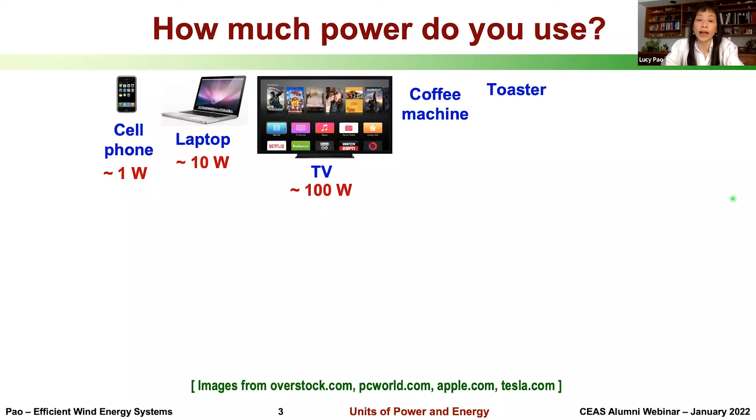Now, there are many appliances in our house that use about 1,000 watts, which is 1 kilowatt. On average, most households draw about 2 kilowatts of power. So you might have one of these appliances running, plus maybe a TV, and you might have your laptop, cell phone charging, and maybe some lights on. Now, if you're running several of these appliances at the same time, then of course you're drawing much more power.

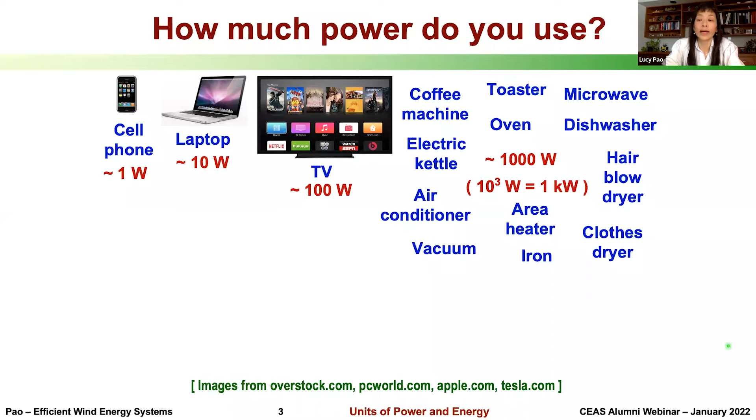Now, more and more people are getting electric vehicles, and if you literally plug into a normal wall outlet at home, it will only draw about 1 kilowatt. Most people who buy electric vehicles will reconfigure one of their wall outlets at home to be able to charge their car more quickly, and this allows the car to draw about 10 kilowatts. And there are, of course, supercharging stations that allow you to charge even faster, and those allow the cars essentially to draw about 100 kilowatts.

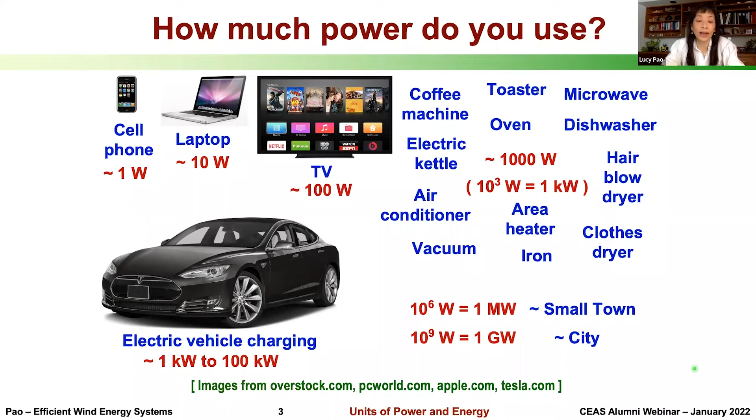Now, 1 million watts is a megawatt, and that can power a very small town. And 1 billion watts is a gigawatt, and that can maybe power a city. Now, the amount of energy used is equal to the power multiplied by the amount of time that power is needed. So if your dishwasher uses 1 kilowatt and it runs for an hour, it uses 1 kilowatt hour of energy.

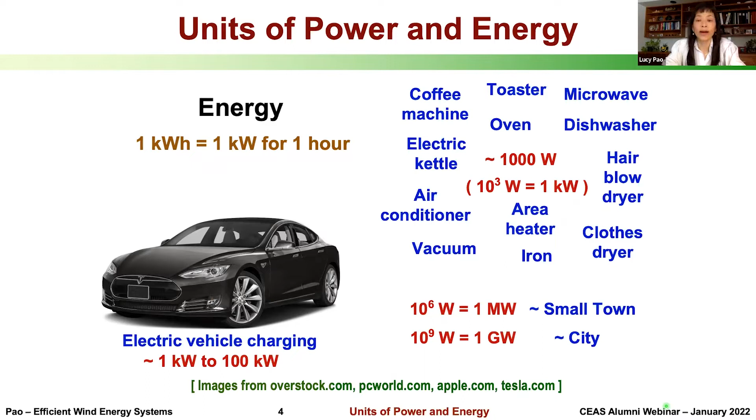All right, so with that, let's now take a look at the status of wind energy. Over the last decade, the installed wind power capacity worldwide has been growing at about 14% per year. There's now more than 730 gigawatts of installed wind power globally. Now, the country with the most installed wind power capacity is China, which has had an average annual growth rate of 27% over the last 10 years.

The US is second with a growth rate of about 12% per year, and then Germany is third with a 9% annual growth rate. So together, China, US, and Germany have more than 60% of the world's installed wind power capacity.

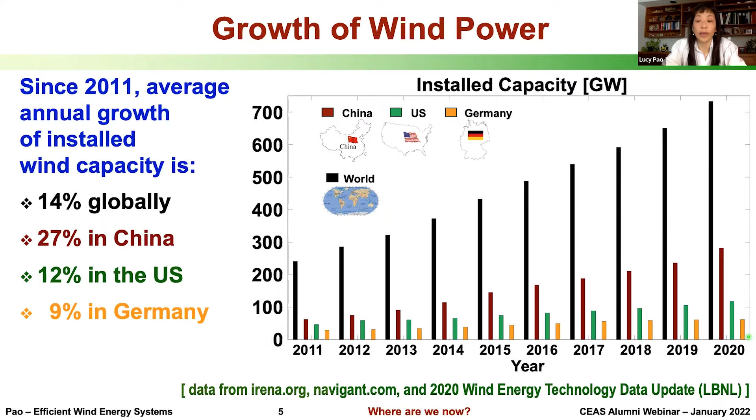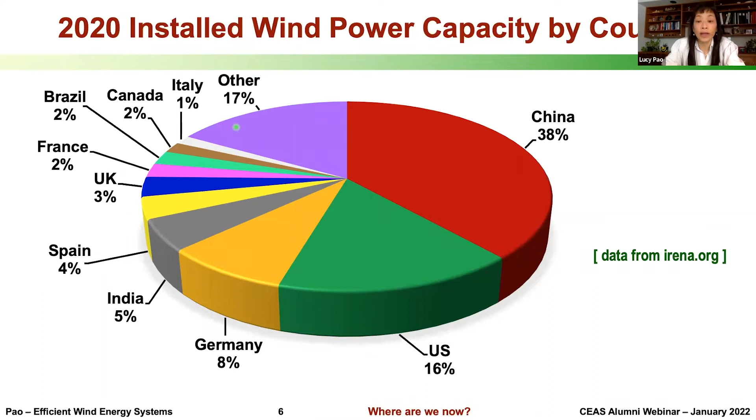Now, this pie chart shows the top 10 countries in terms of installed wind power capacity. And of course, there are many other countries that also have installed wind power. Now, another way to compare countries is by what is known as wind energy penetration or wind penetration, which is the percentage of a country's electrical energy needs that is provided by wind.

In this regard, Denmark is the #1 country. Almost half of Denmark's electrical energy needs is met with wind energy. And these are averages across a year. So Denmark actually does reach 100% instantaneous wind penetration levels at times, in which case they're trying to transmit excess power to other countries that can better use that power at those times.

Now, the top 3 countries that I mentioned earlier in terms of installed wind power capacity, they actually have the reverse ordering in terms of wind penetration. So China has a very large population and hence large electrical demand. And so only 6% of their electrical energy needs are met by wind. In the US, we're unfortunately somewhat energy hogs, and only 8% of our electrical energy needs are being met by wind. And Germany is at about 27% wind penetration. Globally, less than 10% of the world's electrical energy needs are met by wind.

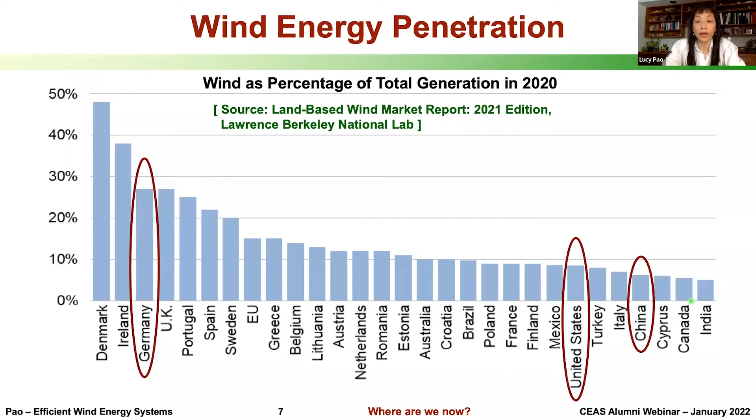So what all this data shows is that it is possible to achieve rather large wind penetrations and still have a stable power grid. And what this data also shows is there's still a lot of room for growth. And many countries are trying to increase their wind capacity in order to mitigate the effects of climate change.

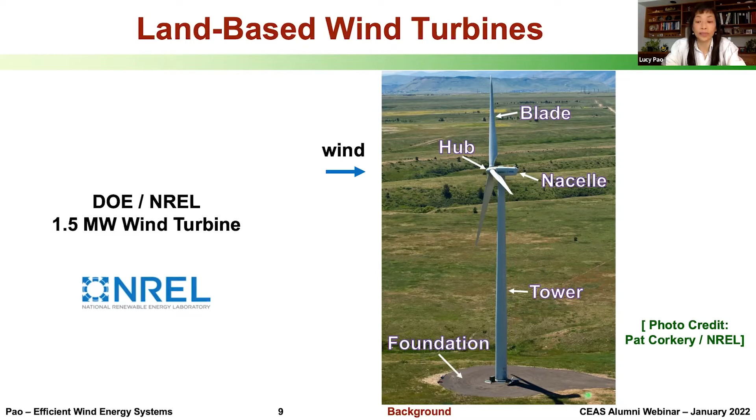All right, now wind turbines, as you've probably noticed, have become bigger and bigger over time. And this is because there are economies of scale that can lead to lower costs of wind energy as turbines get larger. Now, over the last 40 years, wind turbines have gone from hub heights of about 17 meters to now over 100 meters hub heights with at least 60-meter long blades. So in this range, we're at approximately 5 megawatt wind turbines.

Now, we often see wind turbines really far off, and it's hard to appreciate just how large these machines are. If we compare with, say, a Boeing 747, looking at this 100-meter hub height and about 120-meter rotor diameter. And if we compare this rotor area with, say, the Boeing 747 and a football field, including the end zones, hopefully you can appreciate just how large these structures are.

Now, land-based turbines are not really getting much larger than 100-meter hub height and 120-meter rotor diameters. And this is largely because of road and railway constraints in transporting wind turbine towers and blades on land to their wind farm destinations. Offshore wind turbines, however, are not subject to the same constraints, and so they've continued to grow. And there are already a few commercial turbines operating that are more than 12 megawatt turbines and which have hub heights of 150 meters and have rotor diameters that are more than 200 meters. So these are blades that are more than 100 meters long.

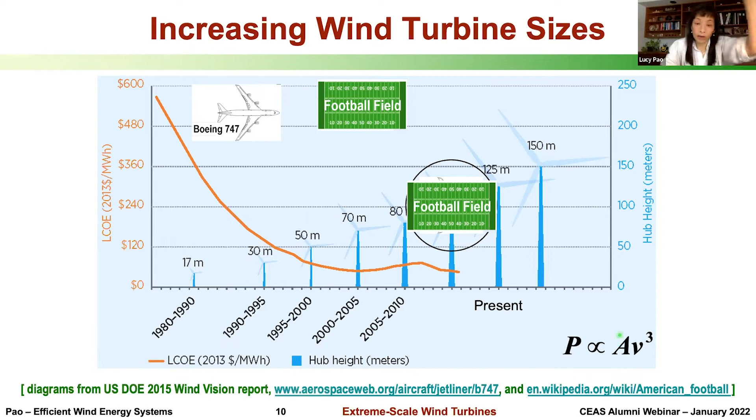Now, one of the reasons that the cost of wind energy decreases with larger turbines is that the power is proportional to the cube of the wind speed, and there are generally higher wind speeds higher off the ground. So building taller wind turbines allows them to capture much more power that's available at those higher wind speeds higher off the ground.

So power is also proportional to the rotor area, and so of course taller towers allow you to put a larger rotor on them. So larger turbines also reduce the number of turbines required for a given site or a given size wind farm, and that cuts down on installation and operations and maintenance costs, and hence this trend towards larger and larger turbines.

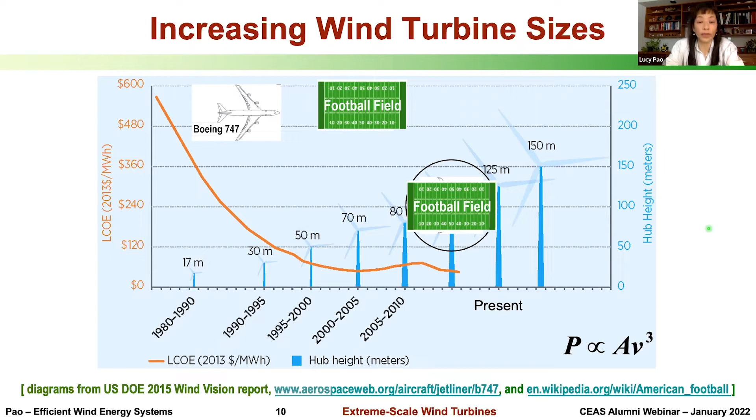Now, along the lines of extreme scale turbines, I'd like to highlight a project that my research group has been involved in with a rather large team, and we've been working on this over the last 6 years. So we've been exploring a downwind 2-bladed as well as 3-bladed concept where we're really focused on really lightweight, flexible rotors. And we believe this downwind concept could be very beneficial as we get to very, very large turbines.

The average size of onshore land-based wind turbines is now about 2.5 to 3 megawatts. And in this overall project, we've been designing 13 megawatt to 50 megawatt wind turbines. Our 13 megawatt wind turbine designs have blades that are over 100 meters long, and that's longer than a football field. And our 50 megawatt turbine designs have blades longer than 200 meters. And that, of course, means that the rotor diameter is more than 400 meters. So these are really large machines.

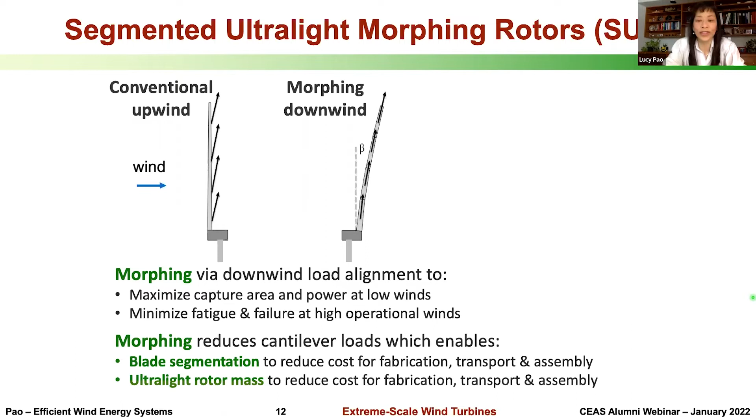So this is akin to how palm trees go with the flow in tropical storms, right? They're very lightweight and the fronds morph downwind, and palm trees can survive hurricane conditions. This is in contrast to oak trees that, while huge and massive, can get uprooted in severe storms, as shown here. So with this downwind concept then, when the winds are light, the rotor will be pretty wide open and trying to maximize power capture.

As wind speeds pick up, the blades will naturally morph downwind, reducing structural loads in the blade. And also by morphing downwind, that reduces the power capture area, naturally kind of regulating the power in these high wind conditions, because typically we don't want to be producing power that exceeds the rated power of the generator that's in the turbine. And so there are a lot of benefits here.

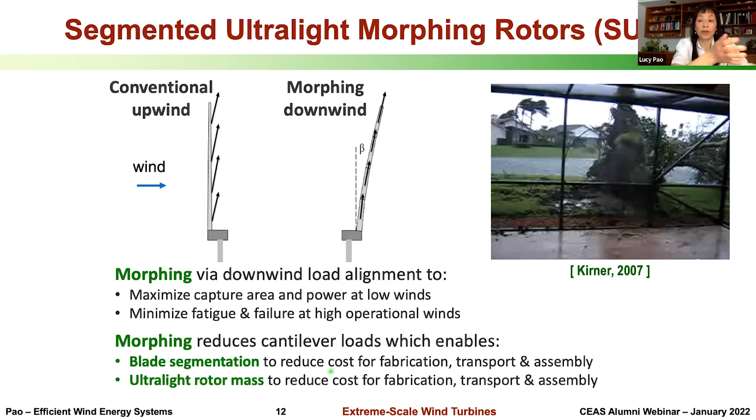Now, with this downwind concept, the blades are lighter, which means that less material is needed to build them, and that makes them less costly. And if they're lighter, then they're also easier to transport and assemble. Now, as we are getting to extremely long blades, some of our collaborators on our overall team project are also exploring how blades can be manufactured in a segmented fashion. Most wind turbine blades these days are manufactured as one whole piece per blade. Being able to make the blades in multiple pieces will make them easier to transport.

Now, wind turbines require large teams to design them. And usually it's a rather sequential, linear design process. The aerodynamicists design the shape of the blades, and then the structural experts determine the layup of materials needed in the manufacturing process.

Now, my group's research area is in the control systems area, and usually by the time that we're asked to design a controller for a wind turbine, all the other aspects have already been designed, and we're just asked to design the best controller that we can to make the turbine operate as efficiently as possible. That is, we want to generally try to have the wind turbine produce as much power as possible under the range of wind conditions expected.

Now, I don't have time in this short talk to really get into the details of the controller designs that we're developing. But one aspect, for instance, is that we measure the rotor speed, so that's how fast the rotor is spinning, and we decide how to pitch the blades. The blades can be rotated, and that changes the aerodynamics, and that can then affect how efficiently the turbine is operating.

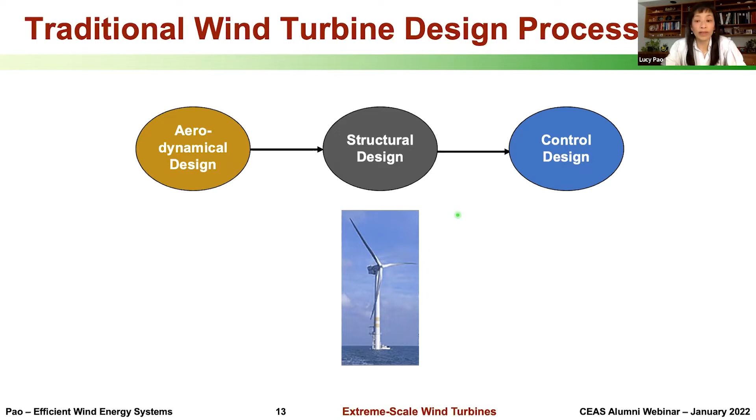And so in our project, in part because we set some very, very aggressive milestones for ourselves, we ended up working more closely as a team. And by doing so, we found we could end up designing more optimized wind turbine designs.

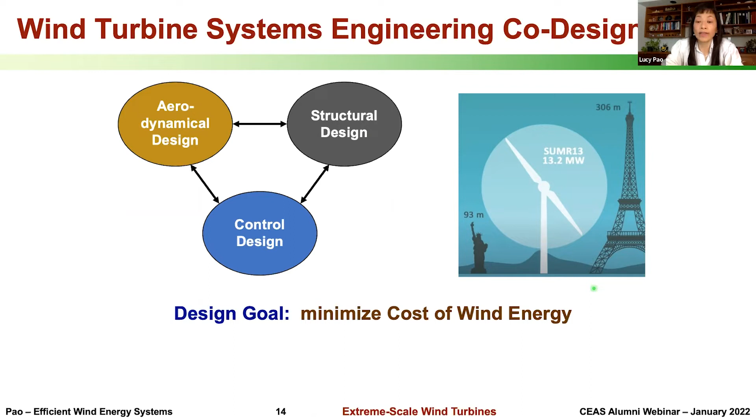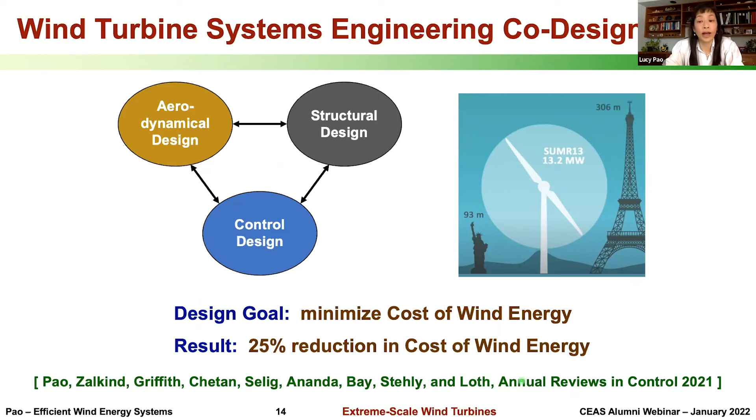And we were recently able to show, by using what we call this co-design process, that we could design a 13 megawatt wind turbine based on our downwind lightweight concepts, where we're trying to minimize the cost of energy. And we are able to show that the lightweight downwind concept can yield wind turbines that lead to a 25% reduction in the cost of wind energy compared to traditional three-bladed upwind designs. So that means that wind energy can be made even more economical than it already is.

Now, in order to demonstrate new concepts, it's very important to be able to experimentally demonstrate them either in a wind tunnel setting or actually out in the field. And we were lucky enough to be able to do some field tests on a research turbine at NREL. So what we did was we took one of our detailed 13 megawatt blade designs and we gravo-aeroelastically scaled it down to 20% scale. And so we ended up with blades that are approximately 21 meters long.

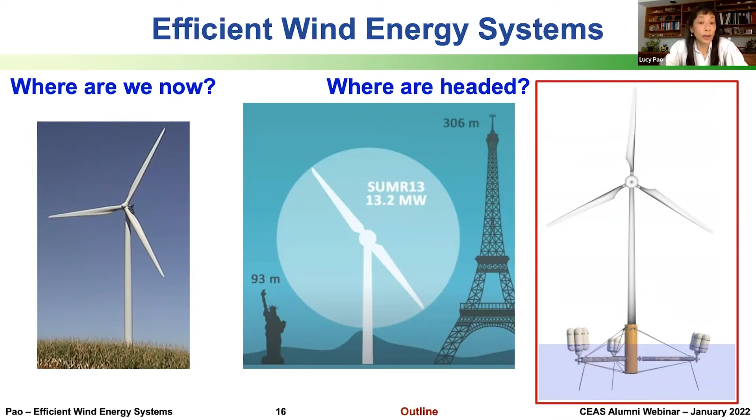With land-based turbines, there are constraints on maximum sizes due to road and railway transportation limits. Offshore, there are fewer constraints, so turbines have continued to grow in size for offshore applications.

There are currently two very small offshore wind farms in the US. One is the Block Island wind farm, just off the coast of Rhode Island. It's a 30 megawatt wind farm, which is very small, using five 6 megawatt turbines. That went into operation in 2017.

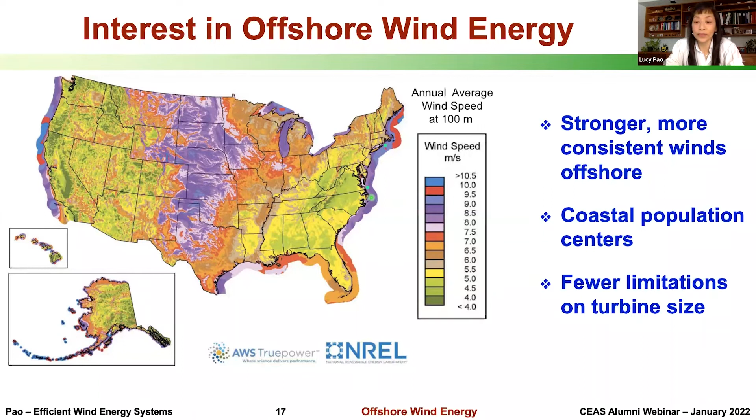Now let's look at the growth of offshore wind power. Recall that the total wind power installed capacity, both land-based and offshore, is now more than 730 gigawatts worldwide. Installed offshore wind capacity has been growing at an average annual growth rate over the last decade of 28% globally, which is twice as fast as the growth rate of wind power in general.

Globally, offshore growth is expected to continue at least at this annual growth rate, meaning there will be more than 110 gigawatts of offshore wind by 2025. It's really tremendous growth. At the end of 2020, global offshore wind was only about 4% of the total installed wind power capacity.

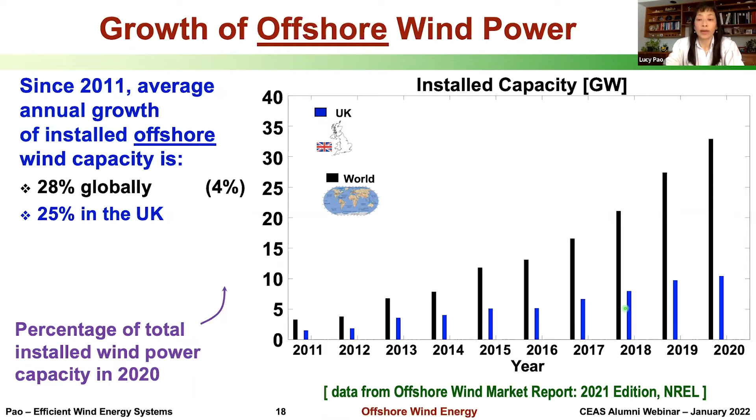In terms of offshore wind, the UK is the number one country. They're a small country with a lot of good coastline and good resource. Germany is number two, and they've been growing tremendously fast over the last decade - this is average annual growth rate over the last decade. China is number three.

There's a lot of variability in these average annual growth rates over the last decade, and some of these are rather large, in part because there was so little offshore wind a decade ago. As a percentage of total wind power capacity, you'll also see a lot of variation, and it depends on the country.

As mentioned, the UK has a lot of good coastline and good offshore wind resource, so it has a lot of offshore wind. China, over recent years, has had a much larger growth rate compared to the other two countries, and based on projections and what's under construction, they've already exceeded Germany, and I believe this year they may surpass the UK, if not already.

The data that I'm presenting has been verified and published, and it's data through 2020. The 2021 data has not been verified and published yet.

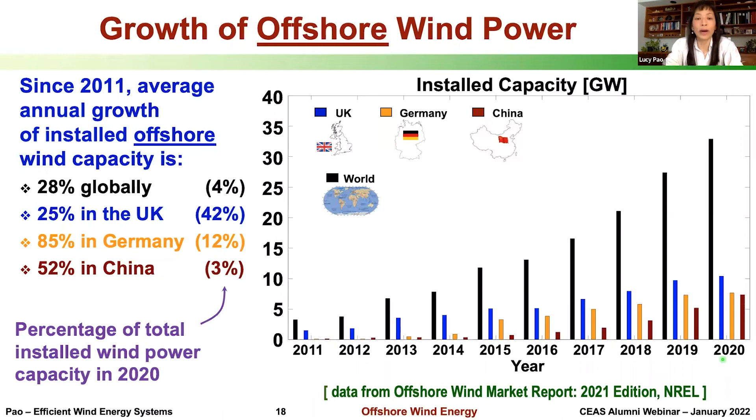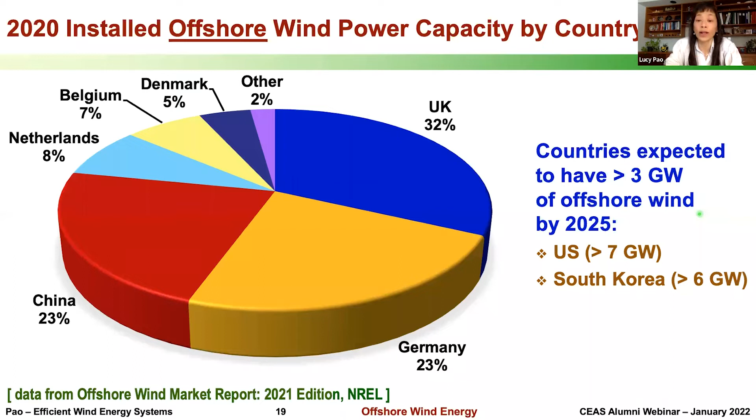The UK, Germany, and China - the top three - have about 75% of the offshore wind power capacity globally. Offshore wind right now is dominated by 6 countries, with very little elsewhere. But a number of countries are planning and already have many offshore wind farms in the pipeline. Countries expected to have more than 3 gigawatts of offshore wind power installed by 2025 include the US, South Korea, Taiwan, and Vietnam.

Right now, more than 99% of commercial offshore wind worldwide, including both small offshore wind farms in the US, uses what are called fixed bottom wind turbines, where the turbines are built all the way down to the ocean floor. These are all shallow water wind turbines. For water depths greater than about 60 meters, it doesn't make economical sense to build wind turbines all the way down to the ocean floor.

Here it's much more economical to use floating wind turbines, and several floating platform concepts are being investigated. When you have a floating wind turbine, both the wind and waves can cause oscillations, and you need to keep the wind turbine upright while also trying to produce efficient power. So there are many challenging control issues.

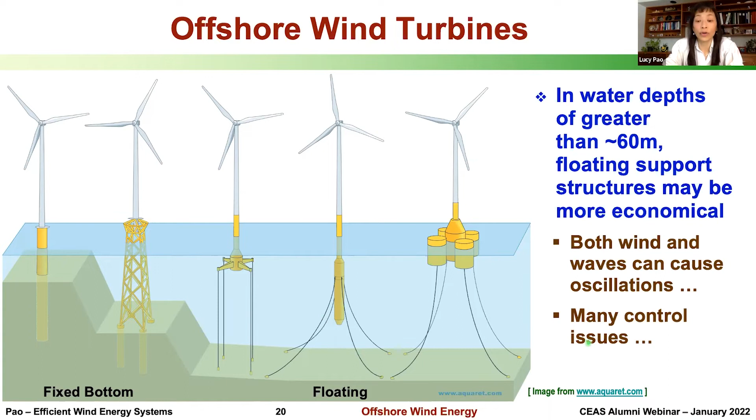About 80% of offshore wind resources worldwide are over water that is 60 meters or more deep. So floating offshore wind is expected to ultimately be a significant share of worldwide wind installations, and large-scale floating wind farms are expected to be deployed as soon as 2024.

Locations where floating offshore wind farms are being considered include the US West Coast, where it's almost all deep water, and the North Atlantic, where there are large population centers and a lack of shallow water sites. Floating offshore wind is also planned off the coast of Hawaii, as well as over the Great Lakes. It's also being considered on the east coast of South America, initially along one section and then expanding further south. Floating wind is definitely being considered in Europe as well as in East Asia.

While there have been a number of smaller demonstration projects in operation for over maybe the last dozen years or so, there are only 2 commercial floating offshore wind farms larger than 20 megawatts. By wind farm standards these days, these are very small wind farms.

So one of these is called Hywind Scotland and is a 30 megawatt, sorry, I didn't want it to advance to the next slide.

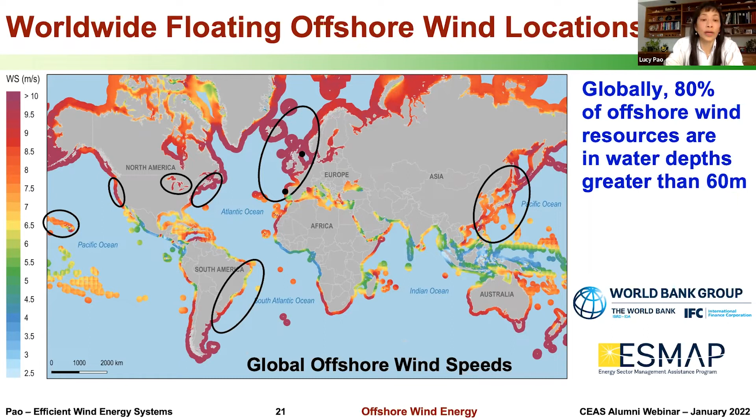One of these is called Hywind Scotland, and it's a 30 megawatt wind farm that began operating in 2017. Then WindFloat Atlantic is a 25 megawatt wind farm off the coast of Portugal that became operational in 2020. The water depth at these two floating wind farm sites is about 100 meters.

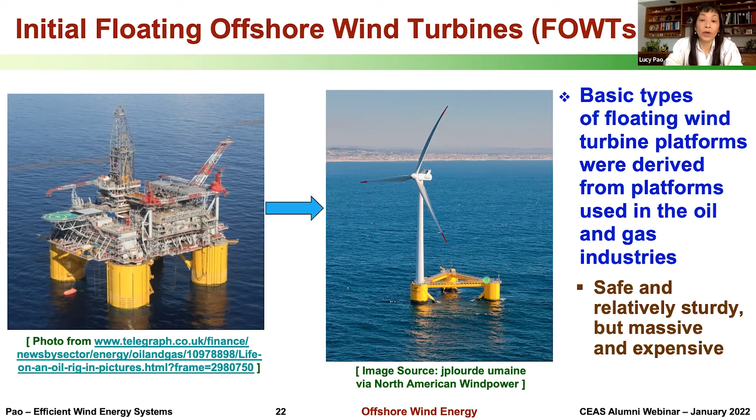Some of the basic floating wind turbine platforms have been borrowed from platforms used in the oil and gas industry. These end up being relatively sturdy, which is nice, but they end up being quite massive and hence expensive because of all the material needed to build them.

Let's take a closer look at the floating platforms, or substructures, at the two existing small floating offshore wind farms I pointed out. Hywind Scotland has 5 turbines of 6 megawatts each, on what are called spar substructures. WindFloat Atlantic has 3 turbines of 8.4 megawatts each, on what are called semi-submersibles.

Now you can't quite see what's underneath the water from these photographs. So let's look at an illustration of these platforms on the right. So somehow it's advancing by itself. So I wanted to make sure it doesn't go to the next slide.

The floating wind turbine on a spar platform achieves stability through a ballast with a deep draft. But one of the challenges of this type of floating platform is that most ports don't have deep enough water for such turbines to be assembled at port, so it's more complex to try to assemble the turbines closer to where they're actually going to be located.

Whereas semi-submersibles achieve stability by distributing buoyancy widely at the waterplane. The advantage of this design is that because of the shallow draft, these floating wind turbines can be assembled at port and then just towed out to their eventual sites with regular tugboats. As such, this is one of the more popular floating platform designs right now.

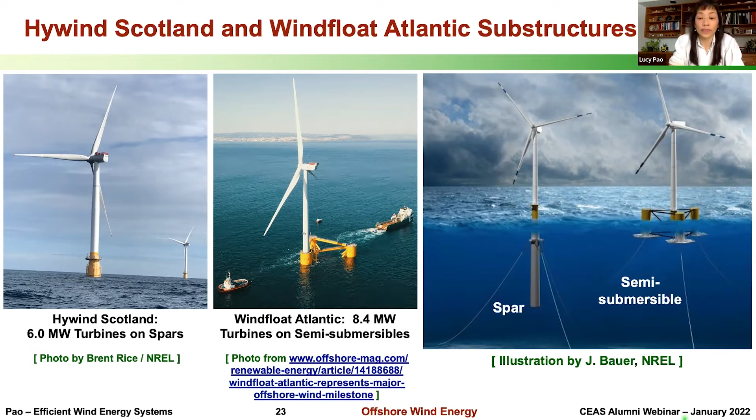Let me briefly highlight one of the projects we're working on in the floating wind turbine area. Our project is called Ultra Flexible Smart Floating Offshore Wind Turbine, or US Float. Our focus is on the design of a novel platform that we call the spider float. So spider float refers to the platform, and US float refers to the entire turbine.

We're using a similar control co-design approach where we work very closely with the structural designers to better understand how we can reduce the mass, and hence the material costs, of the floating platform. Our role in the project is also to address the challenge that as we reduce that mass in the platform, it becomes harder to control. We need to make sure we can keep the turbine upright while still producing power efficiently.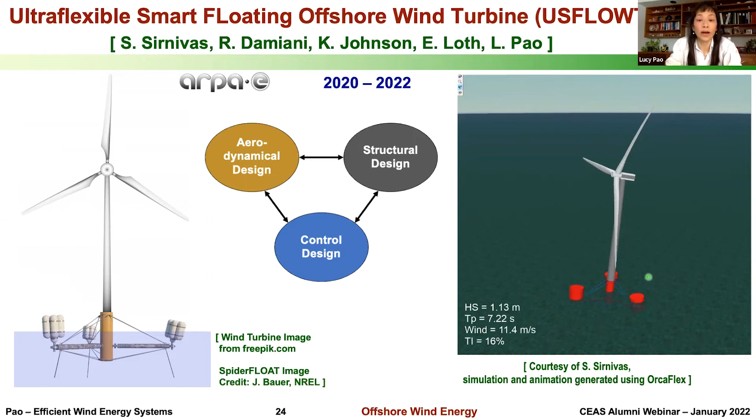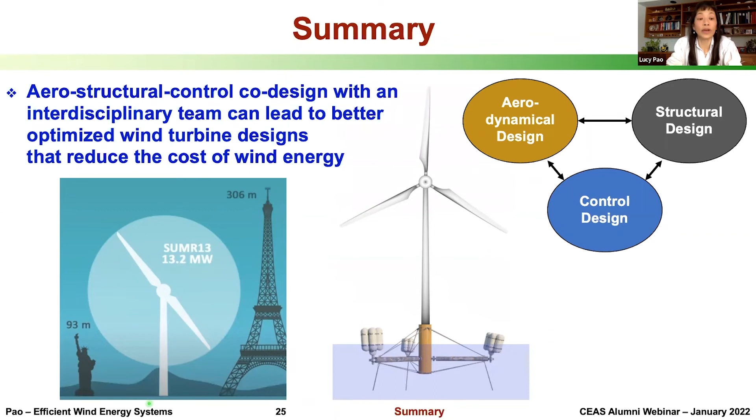So in summary, we have found through several different projects now that this aerostructural control co-design process with an interdisciplinary team can be very productive in leading to better optimized wind turbine designs that reduce the cost of wind energy.

Now, floating offshore wind installations are expected to grow rapidly for some time to come. The cost of floating offshore wind energy is expected to decrease to similar levels as for fixed bottom wind energy. So then it won't be a matter of only developing shallow water sites, but rather developing offshore sites that have good wind resource and choosing the fixed bottom or floating technology that is appropriate for that site.

Given the global offshore wind resource available, floating offshore wind is expected to be a big part of the solution trying to mitigate and stop climate change. There are many research groups and companies trying to minimize the cost of floating platform substructures, largely by trying to reduce the mass in these substructures.

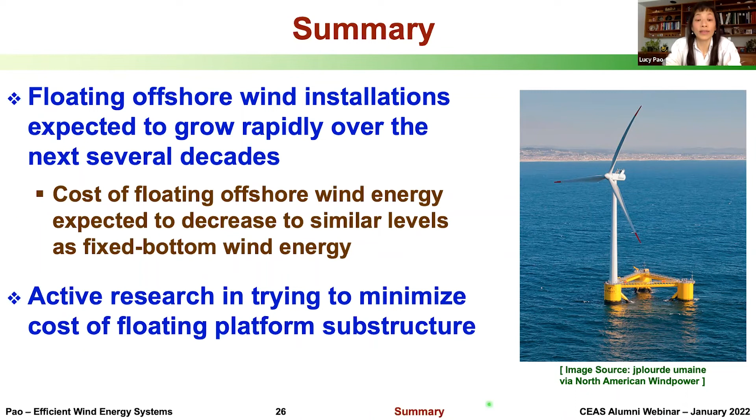Now, it's relatively well known that coordinating the control of individual wind turbines on a wind farm can lead to overall greater power production across the wind farm. And wake effects are now also taken into account in optimizing placements and layouts of wind turbines on a wind farm.

Now, there are a number of interesting open questions when considering floating wind turbines. For instance, a floating wind turbine, because it's moving, how does the wake behind floating wind turbines behave? Does the wake dissipate faster behind moving floating wind turbines? If so, that could lead to advantages for floating offshore wind farms, as they won't have as serious wake effects because the wakes potentially could dissipate before they reach that next turbine.

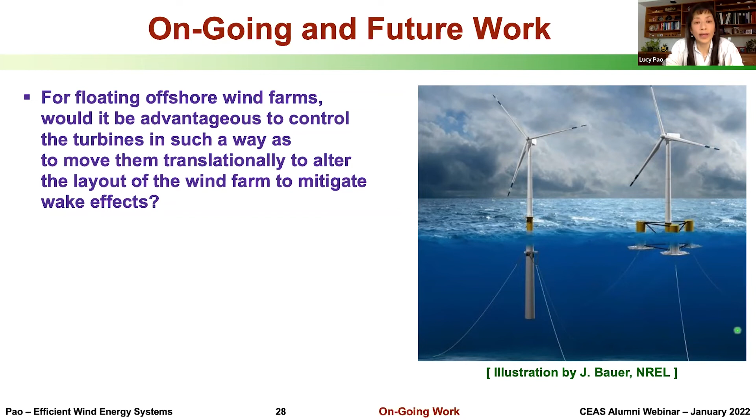Okay, so also for floating wind farms, if the mooring lines are relatively slack, which often they are, would it be advantageous to control the turbines in such a way that we can shift them slightly translationally depending on, say, the wind direction? In this way, we can try to change the layout of the wind farm slightly depending on the wind direction, again, to try to mitigate the effects of the wakes in floating wind farms. So there are many open questions, especially related to floating offshore wind turbines and wind farms.

As we're going to larger and more extreme scale turbines, there remain many grand challenges. I was fortunate to be part of a group of researchers that put together an article published a little over 2 years ago on what we view as the grand challenges in the science of wind energy, and much of what we said there still holds true now.

Since that time, we've divided our group into several groups, each focusing on a particular aspect, ranging from atmospheric sciences to grid integration issues. The group I'm in is focusing on the wind turbine, and we're writing more detailed follow-up articles on the challenges in each focus area. Those follow-on publications will hopefully appear over the next year, so stay tuned for that.

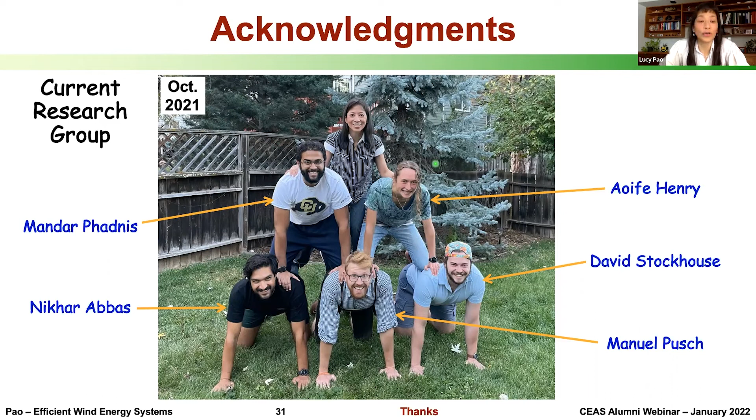More generally, I want to thank my research group for teaching me about many aspects in the control of wind energy systems. And of course, I want to thank our sponsors that have supported our research in wind energy over the last 5 years, in particular ARPA-E, the Advanced Research Projects Agency Energy, which has provided the primary funding for both our SUMR and USFLOWT projects. And last but not least, thank you all for listening.